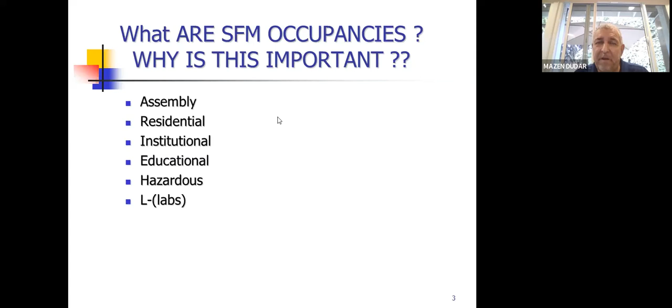Rated assemblies - what is actually an assembly to begin with? The way I define an assembly is different than the code. The way I define it is a bunch of stuff and material put together and slapped around, so it gives you a 30-minute, 1 hour, 2 hour, 3 hour, or 4 hour rating. And what is a 1 hour, 2 hour, 3 hour rating, and why are they needed?

They are simply needed because the elderly will take time to get out of a building. Sometimes you can put somebody in a wheelchair and wheel him out quick. And maybe somebody who's 45 and in good health can run and does not need the 1 hour wall. A 1 hour wall is pretty much theoretical, meaning it takes the fire a full hour before it crosses that wall, or 2 hours sometimes, technically based on test data and UL and ASTM fire tests.

Yet, do we need all of this? Highly likely, no. But what is the life safety percentage that we have in this country as far as fatalities from fire?

It's very low, and the reason for that is because we have great protection systems in place. So when a lot of people say, I don't need a 2 hour wall here, everybody can get out in 3 minutes, that's all true, but not everybody can. That's why we have areas of evacuation, sometimes inside the building, sometimes outside. We have rated assemblies, we're going to get into all of that, but again, rated assemblies are extremely important.

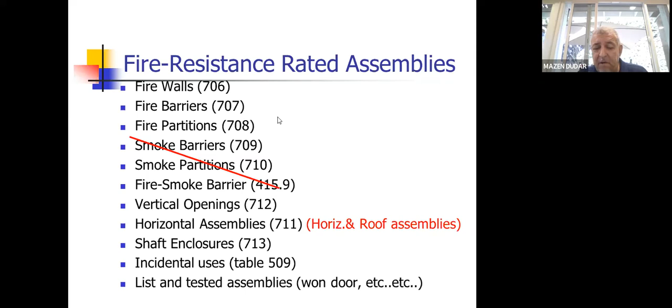Firewalls, fire barriers, fire partitions, vertical openings, we're going to cover all of that. Shaft enclosures, there's a lot that we're going to cover, and we're going to go through it one step at a time.

Okay, a lot of people attending this class may not even know about the UBC. Maybe people like Richard Lucas was here, maybe would know what the UBC is, and he may have heard of those terminologies before. But since the UBC has kind of parted from us since 2006, I would say it's been about 17 years. A lot of people have retired, and a lot of people don't even know what the UBC is or was. Yet a lot of us are seasoned veterans that still know what the UBC is.

So when a building inspector walks into your office, and by the way, if the pace is a little bit fast, my apology, it is a lot of material we have to cover, but a lot of it is actually just narrative. So bear with me, and we'll get through this.

A building inspector walks through the office and looks at the plan checker, and he actually shakes his head, and it happened to a lot of plan check engineers. And he goes, they're butchering that firewall. Okay, when you come in now and you say they're butchering that firewall, what exactly do you mean? The firewall, the fire barrier, the fire partition? What exactly are you talking about? Before, we didn't used to ask these questions.

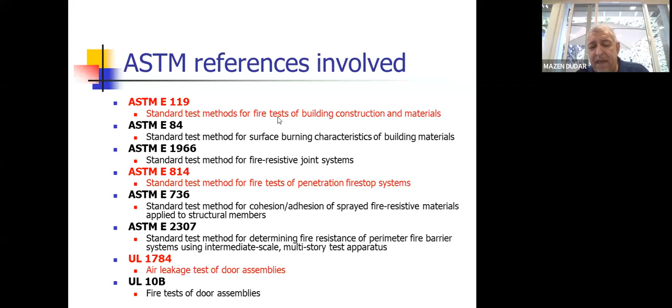Okay, here are all the ASTM standards that we use in tests. The most important one is the one on top, ASTM 119. That's the test for building construction and material. That's the one they run for a 1 hour test, 2 hour test, etc. NFPA has another number equivalent to that, and UL has another number equivalent to that. But ASTM 119 is the one that is most known.

And these are same tests, but different standards: ASTM E119, NFPA 251, UL 263. Any one of those three are equivalent to each other, pretty much. If not 100%, they're 99%. And if you meet one, you normally meet the other. So these are the three tests that you always want to keep in mind, and the most referenced tests.

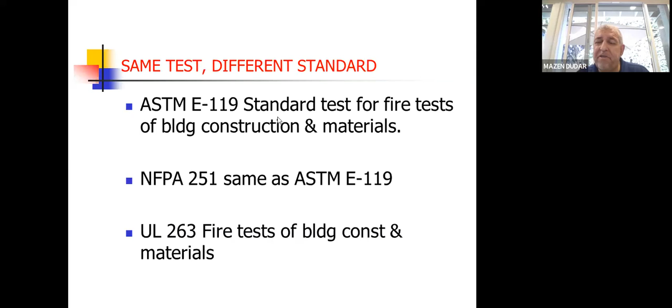What exactly are the tests, and how do they go through it, is really beyond the scope of this seminar. Okay, establishing fire resistance rating.

We talked about ASTM 119. We talked about UL 263. When we normally have these kind of tests...

You're not allowed to have a cooling effect or fire suppression system. So if you're testing a wall for 1 hour or 2 hours, you cannot be hosing it down or have sprinklers on it during the test. It's tested without it, unless that specific test requires the cooling effect. But normally speaking, you do not do that.

The building official can always accept, under alternate methods and modifications, anything other than a 1 hour, 2 hour, or 3 hour recognized assembly, through methods of testing or through methods of calculation, which I cannot go over again due to time constraints. But there's a way to calculate what every assembly is good for, half an hour, 1 hour. You can actually calculate that.

Okay, let's get into the nitty-gritty stuff now. Important definitions. What are the things considered important and relevant to definitions in this chapter?

First thing you're dealing with is fire partition. So it's a vertical assembly. It's a wall. It's a 1 hour wall. It's as simple as that.

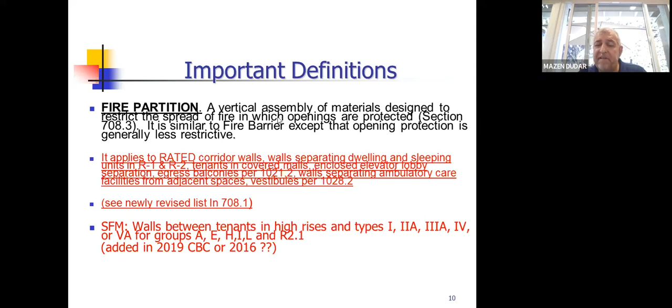Okay, here's a summary. I urge you, when you're dealing with anything in chapter 7, you can go to the code anytime, and this is really the reference. But feel free, and it's always good to come in and take a look at all the summaries I have for you. If you're dealing with a fire partition and you want the summary and don't want to miss anything, here are your summaries relevant to that.

I have an arrow next to the openings, and it shows you that if you have doors in a rated corridor, then you need a 20-minute self-closing door, rated 20-minute and self-closing. The transom and side lights, meaning the windows next to the door - to the left, to the right, or above it - are called transoms or side lights. These need to be 45-minute rated.

And any other window within that corridor - let's say there's a ballroom or an assembly conference room somewhere with windows - if this happens to be a rated corridor, you are going to need a 45-minute window assembly rating.

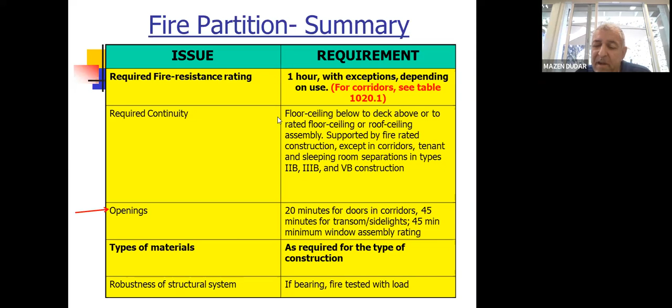Okay, let's talk about fire separation distance, which is also called the setback. The setback is the distance measured between the face of the wall and the property line. In this example, you can see 30 feet on top, 75 feet on the right-hand side, 15 feet at the bottom, etc. And these are all setbacks. They've changed the word - there's no word setback anymore in the code.

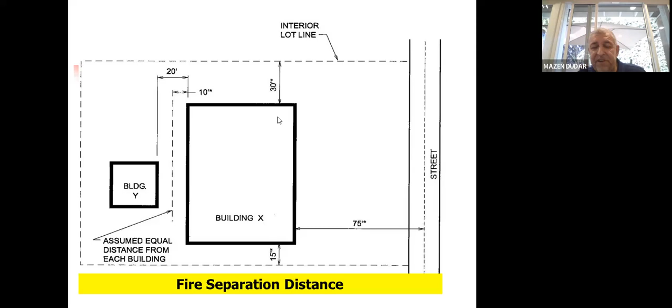It's called fire separation distance. I don't like that, I like to call it setback, but because we're dealing with chapter 7 and it's a fire chapter, the name is fire separation distance.

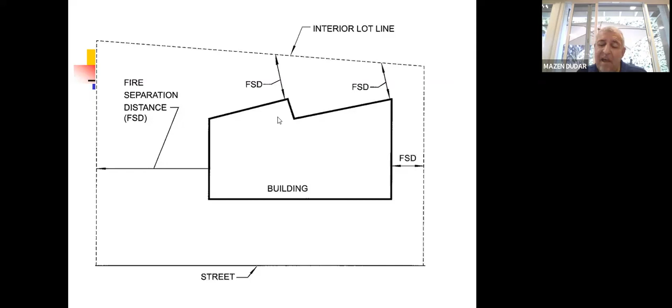What happens when you have buildings that look like that? Take a look at the top, the right-hand side, the left-hand side - you will see the FSD. Left and right are easy. The top ones, this is how you would measure it: you would measure it perpendicular to the building. You do not measure it perpendicular to the property line. The FSD line is actually perpendicular to the building, and that would be the distance that you measure for your setback / fire separation distance.

Now, when we're dealing with a 1 hour or a 2 hour wall, and you look at certain tables in the code and tell an architect or anybody else you need a 1 hour wall or a 2 hour wall, etc., the one thing I want you to know is that it's different when it comes to non-SFM occupancies versus SFM occupancies. Here's the difference.

Non-SFM occupancies: if your separation distance is under or equal to 10 feet, and that wall needs to be rated for 2 hours, then you need to have the 2 hours rated on both sides of the wall. The whole assembly needs to be there. So you will go to a 2 hour assembly and choose it, and that would be it.

If you're more than 10 feet, your rating is only required on the inside. If they decide to put siding on the outside, technically they can, but I would say no more than 0.5% of the people out there know that you can do this, rather than putting a full assembly. And they want - then everybody usually says 2 hours, I'll give you the 2 hours, and case is closed. So I don't go out there advertising all of this because I'm an advocate for safety. But can you only do it on the inside? Yes, you can. Yet nonetheless, nobody does that.

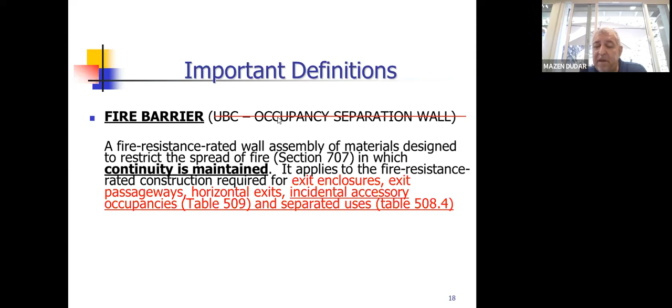However, anytime you're dealing with those, you are going to have a fire barrier to some degree, either 1 hour or 2 hours. Okay, we're going to continue with fire barriers.

Again, here are all the areas that would require a fire barrier. This is a little bit of write-up on the red. This is a complete list and where they are located. So anytime you want to know if you need a 1 hour based on what you have, I gave you the section, I gave you what is going to be required, 1 or 2 hours.

On the atriums, I just put in 2023 code changes for anybody who likes to read about atriums. I want you to know there's been a lot of changes, or some changes, in the 2023 code. It's not a part of the presentation, but I just wanted to let you know.

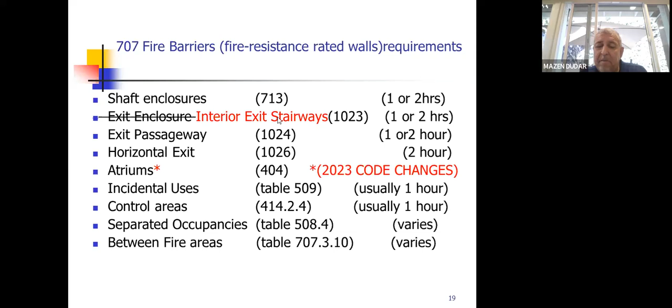All of these actually would require a 1 hour or 2 hours, or it may vary, like the bottom 2 cases. All of these are examples of fire barriers. It's a very good guide, this table, for where to go and what the actual rating is going to be required. The section is going to tell you exactly what rating is required, depending on the situation that you have.

Okay, we are still discussing fire barriers, but there's this table here, 707.3.10, which deals with fire areas. Now, what is a fire area? In a nutshell, if you are running out of allowable area in a building because of what's allowable to build, you can put in a fire area, follow certain provisions, and make 2 separate buildings.

When you put in the firewall, you create 2 separate fire areas. And when you create separate fire areas, that wall is actually going to be rated. And the rating of that is going to be as a fire barrier.

Let's go over that again. It's a little confusing, so I'm going to start from the beginning. If you actually have an allowable area problem, you can introduce a firewall. Okay, so I'm going to take back what I said - a firewall has nothing to do with this particular section.

However, you can introduce a fire barrier between 2 fire areas that you create, and depending on the occupancy, you would have to rate the fire barriers based on this table. So if I have a building and I decided to create 2 separate fire areas for whatever reason, and I end up putting a fire barrier in between the 2 fire areas, and one of the areas was an F1, the other one was a B, looking at that table, you're going to have to go with the 3 hours.

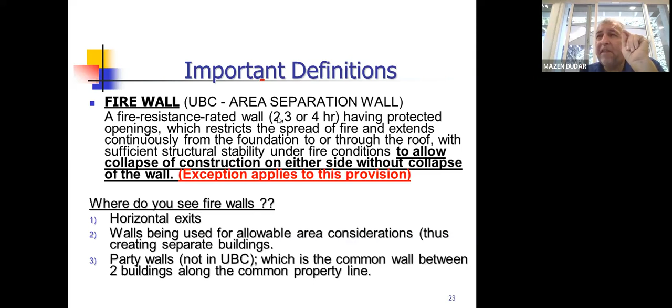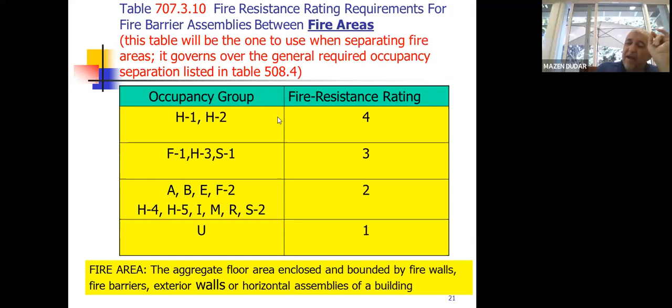But there are times where you would create separate fire areas of different occupancies. If you create fire areas of different occupancies normally within the same building, that's when you're actually putting in 707.3.10 — these are fire barriers. So you could have firewalls to create separate areas for allowable area, and within each fire area, you could have fire barriers separating occupancies. That is correct.

It's really confusing, and it's not that easy. Even I have to read it 50 times every time. Okay, thanks so much. You're welcome.

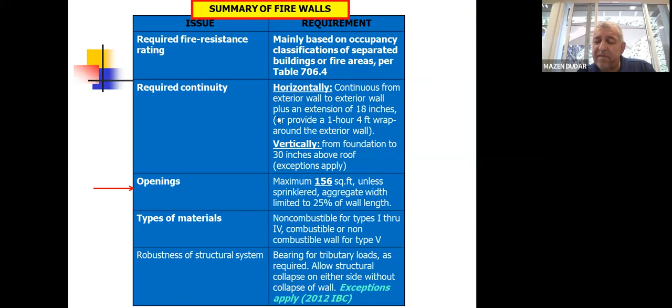Summary of firewalls: if you read this, it'll tell you the summary of any firewall you're dealing with. I don't want to tell you not to go to the code, but whatever the code tells you, it's right in front of you in that table. The most important one is the openings — how much openings can you have in a firewall? 156 square feet, no more than 25% of the wall length, similar to the fire barrier.

You have to go and put in fire barrier, protect all openings, and it'll tell you the number of how high the writing should be, where the sign should be. It should start no more than 30 feet apart and within 15 feet of the end of the wall.

We're not talking about a 10-foot fire barrier here or a firewall. We're talking about a 200-300 foot one, where you actually have to do that so a contractor or somebody can see this and realize we cannot cut that. Let's go back to the design architect and to the building department. This is the narrative, something that they can put in there.

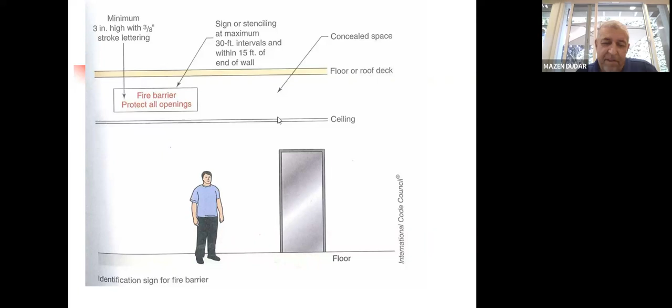Okay, now let's talk about exterior walls and the allowable area of openings. The code has changed a lot in the past 10 years. The code now allows you to actually have unprotected and protected openings within the same wall, rated for 1 hour and 2 hours. To me, I don't like that, because the fire doesn't know where it's going to go. The fire is not going to know which area is protected and which opening is not protected.

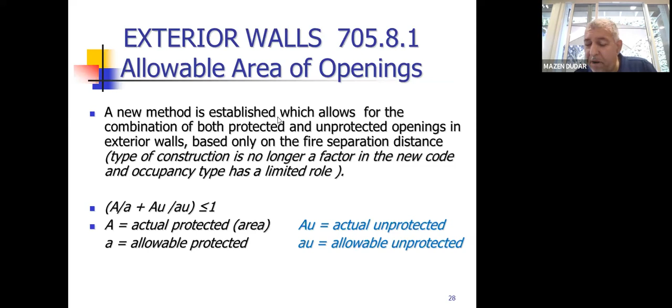The way it goes is always less than 100%. So your actual protected over allowable, plus the actual unprotected over the allowable unprotected, must be less than or equal to 1. Here is the table, which is not going to mean anything to you right now till we get into an example. So I'm going to get directly into an example and show you how that works.

I want to solve for the protected openings, and you can pick and choose where you want to place them. It's up to you. Again, it's not my favorite thing in the code, but it's in the code, and that table is extremely important.

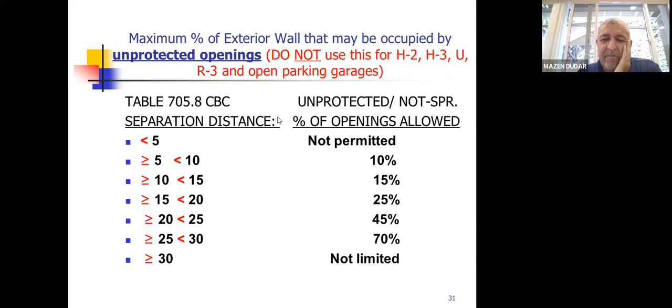This is the same thing as the table itself, but use it only if you're dealing with unprotected percent of openings allowed. This is the same thing as the table, but I trimmed it a little bit and did not put in the sprinklering. But this is the actual table. This is the one you should always go to. Do not worry about Mazen's creation, stick with this.

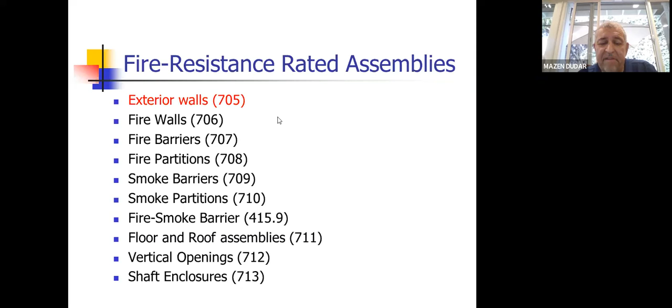Okay, let's go back and talk about rated assemblies. These are all the rated assemblies in the code, and this is their respective sections. We talked about some of them, and we're going to talk about a little bit more. I put all the sections in front of you, and like I said, smoke barrier, smoke partition, smoke fire barrier, we're not going to talk about that today.

Okay, this one has a lot of mumbo jumbo. I'm going to save you that in section 705.8.6 and take you directly to a diagram and explain it to you. Here I am dealing, I've got two diagrams that are the same.

If I have two buildings on the same lot, the first thing for allowable area, I can consider both of them per Chapter 5 to be okay if the aggregate allowable area meets the allowable area for the most restrictive occupancy, including setbacks, fire separation distance, etc. If both of them are within that allowable, then I don't need to worry about it at all.

But if I have a lot and I decide to put a building on the left, and the one on the right is existing, unless I'm doing the allowable area as one building, I have to put in an imaginary property line in the middle, and I need 15 feet minimum. If I do not have the 15 feet, and if I also do not have the openings on the building on the left at least 15 feet higher than the roof of the building on the right, there's going to be a requirement to protect the windows in the building on the left.

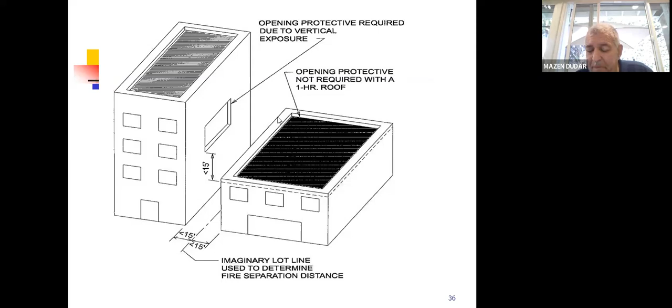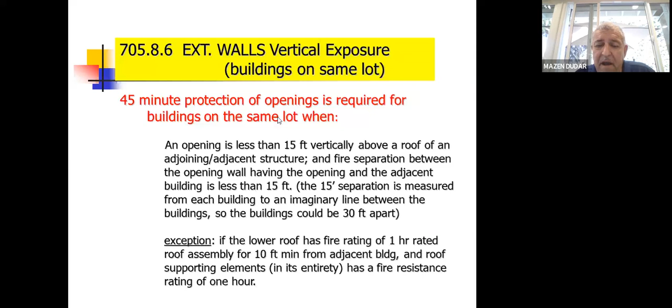Okay, now required opening protection for exterior walls. When you need to rate fire doors, we're going to go later to a specific table. We're going to also go to a specific table in section 716.1 for fire windows. And remember, we just talked about rating all that stuff here, all those openings on the left-hand side, unprotected openings or protected openings, per this section.

If you have a sprinklered building, the exterior openings may be protected by an approved water curtain. I don't like it personally, but again, it's not about me, because if it's a sprinklered building, well, you're just giving me more water on the opening. I don't like that. I already have water, and my water supply could be messed up very quickly in an earthquake, who knows.

I would rather have the rated openings and the rated shutters and all that. But again, you cannot deny an applicant the exception if they want to approach you and put in a water curtain, which is sprinklers probably on the outside, maybe also on the inside if you require it as a building official. The City of LA, I think, has a detail relevant to how that's done or how that's approved. I did not see it much in LA County.

A lot of the designers and architects simply do not know about that. Is it really your job to advertise it? You can if you want to. It's in the code, you're not really hiding anything. It's not my favorite thing, but the code does allow you to put that instead of rating the exterior openings, which are very expensive. Putting a water curtain is a whole lot cheaper than rated openings, etc.

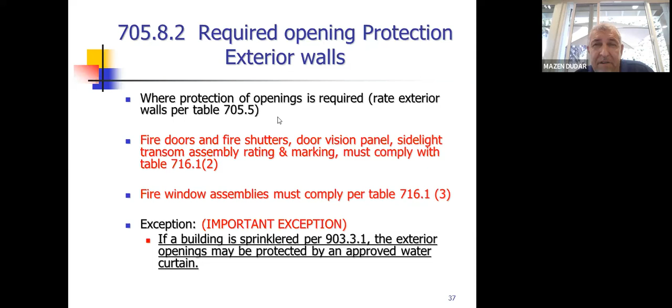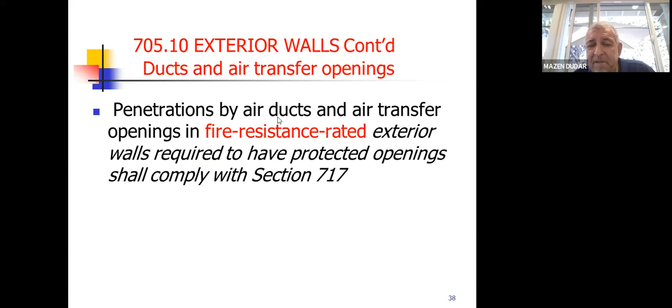Okay, we're also going to talk about ducts that are penetrating rated assemblies in section 717 and how to deal with that.

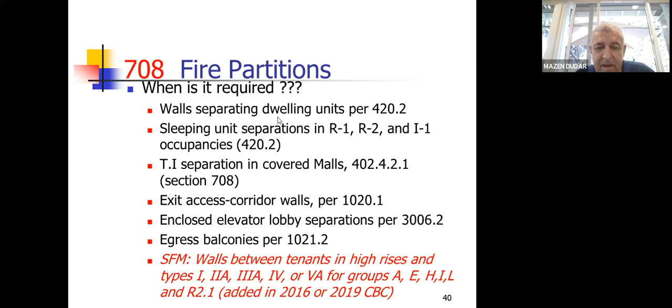Anytime you penetrate a rated fire partition, you need a fire damper. But there's an exception in the code: if you have a sprinklered building other than Group H, you can omit that fire damper in a fire partition, provided you're dealing with a 26 gauge HVAC duct. Omitting fire dampers is really a huge money saver.

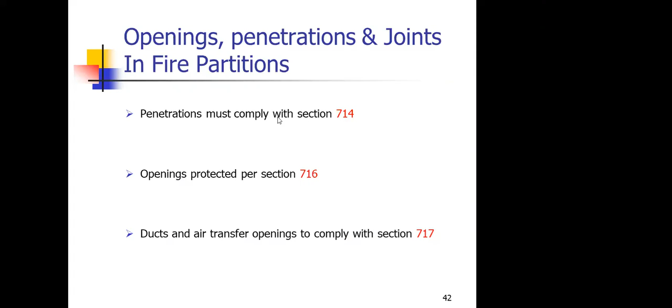Anybody have any questions before I continue, or shall I keep going? Hello? Anyone? Cynthia, Mazen, I don't see any questions in the chat. Okay, great, I'll continue. Let's see how we're doing on time. We're doing fantastic on time.

This now gets a little bit hairy as we get into the subject matter. We're going to dig a little deeper now and talk about penetrations, protection of openings, and how to deal with duct and air transfer openings when they're actually penetrating a rated assembly, which is section 717.

Now we're going to deal with opening protectives. When I have a firewall, it can have no more than 156 square feet of openings, and it also needs to meet the criteria of 25% of the length of the wall. So if I have a 1,000 square foot firewall, I cannot have more than 156 square feet in area as far as the opening goes, total openings. As far as the length of the openings, I'm restricted to 25% of the length, so 250 feet. That's basically what's required.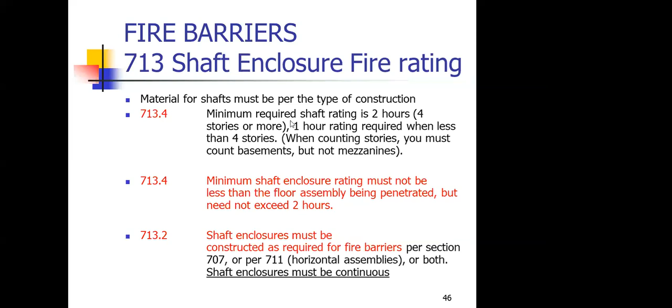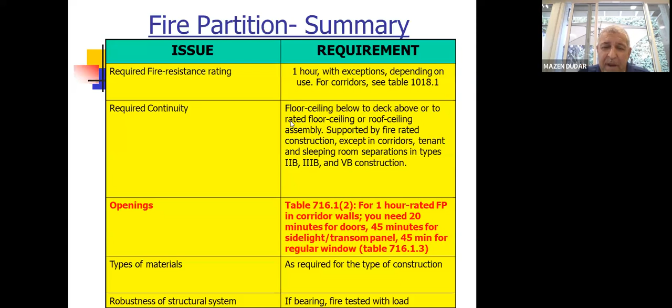Mazen: I'm a little confused about the rating of the corridor also. You're confused about what? The smoke dampers of the corridors, rated corridor also. I think we need smoke damper for corridors, if it's rated. Yes, I didn't say you don't need them, all I'm saying is you would need... Oh, you're saying we need a smoke damper, not just a fire damper, correct? Yes, sir. We're gonna get to that. I gave an example relevant to the fire damper, with the exception of the fire damper. I did not say you do not need a smoke damper. There is a table that will show all of that, and I will get to it at the very last slide. If it's required, it will be shown in my slide. Or just the fire damper can be exempt under certain specific rules. We never said you do not need a fire damper, we just exempted a specific application, that's it. So hang on, I will get to that in detail again.

Okay, thank you. So where are we? I forgot. Okay, now I'm on slide 46. We're going to talk about shaft enclosures now.

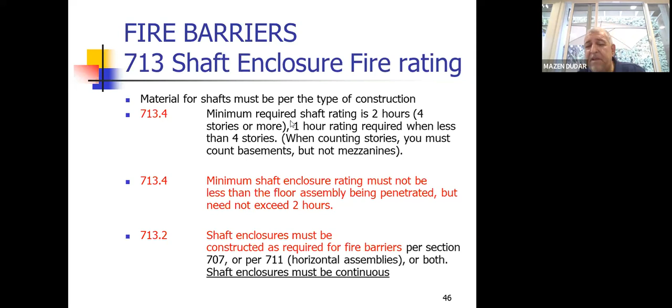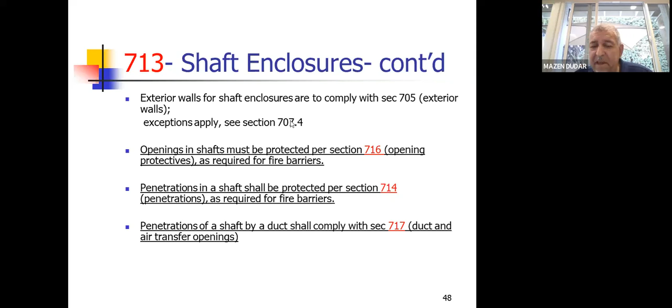As we deal with shaft enclosures, we're going to get into the openings - that's the section for penetrations in 714, and the shaft penetration by a duct in 717. This is just preparing you for the sections coming forward.

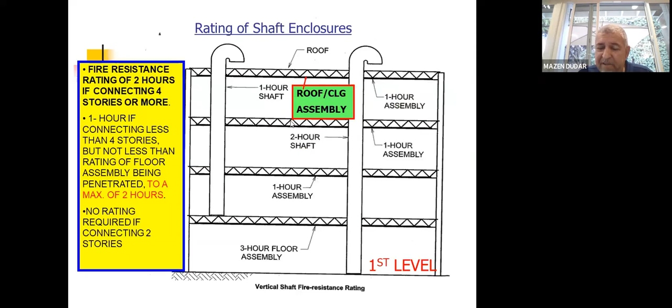When dealing with termination rooms like chutes - for example, in a 4-story condo complex, people go in there and throw their garbage and refuse down a chute, and it comes to the termination room at the bottom - that could span 4 or 5 stories, and these would be fire barriers based on what I just showed you in the diagram, either 1 or 2 hours depending on the side.

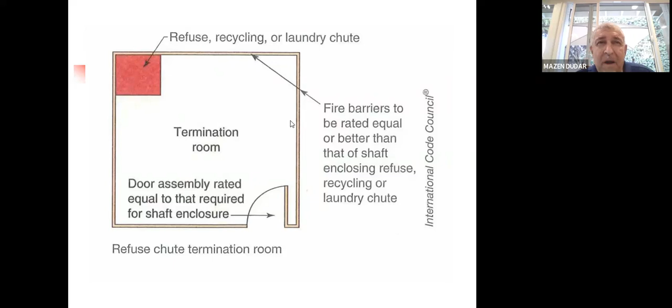And the door actually has to now be rated as well as that required for a shaft enclosure. So the fire barriers may be the whole room, plus you need to also rate the door, and the door needs to be self-closing. We don't see that too often, but remember, your fire barriers and the termination room at the bottom need to also follow the same sequence along with the door. The door at one point didn't used to be required, and I know they added it - I just don't remember how long ago, maybe in the 2013 cycle.

Look at number 1: there is no limit on the size of openings of adjoining fire areas that are sprinklered. So if I have 2 fire areas, one to the left, one to the right, with a common fire barrier in between, and both are sprinklered, the 156 square foot rule is out. The openings must still be protected, and the 25% rule of wall length - the maximum opening allowed - is still applicable. It could be a lot to deal with because it's a lot of criteria, but go to that page and read the exceptions, and you will find it.

Fire door serving enclosures leading to interior exit stairways: so when you're in a 10-story building, you open the door to go into the stair enclosure. Even though that's a stair enclosure, meaning a rated shaft, and the door is opening into the shaft, the provision of 25% of the wall length and the 156 feet do not apply when you're opening a door to get into the exit enclosure. You cannot tell somebody you're exceeding this or that - it does not apply. Also, look at number 4, it does not apply when you finish the stair enclosure and end up at the bottom with an exit passageway that takes you to a lobby or directly to the outside. That rule does not apply either.

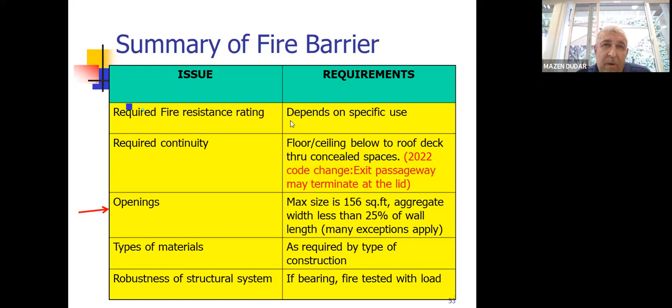And that makes sense. I'm already in a safe haven rated 1 hour or 2 hours. Why would I need the walls to go all the way? It made absolutely no sense the way it was in an exit passageway before. So that's just a little change in chapter 10 I wanted you to be aware of.

Okay, smoke barriers we're not covering. Summary of smoke barriers, we're not covering that either.

And as I actually said in my class before at the County of LA, when I called her, because it came with unlimited changes, when I called her one time to make the changes before my presentation 4 months ago, she reminded me that she actually has a mortgage now and she doesn't have the time for me. So that was the little joke there, and that will continue.

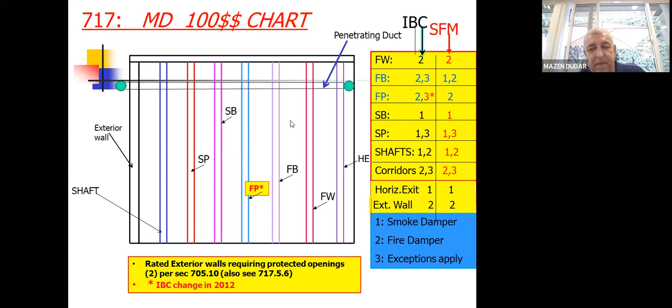Okay, floor and roof assemblies - these are the horizontal assemblies. We're dealing with table 601 and 705.5. The two things I needed to keep in mind: requires separation of occupancies, horizontal or vertical. Go to table 508.4, it's a different subject matter. And also 707.3.10, which is this one that we've talked about too earlier.

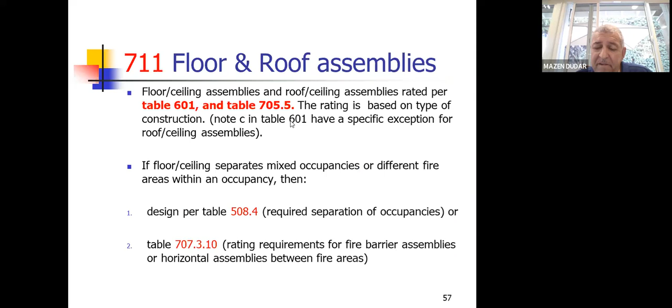If you are using this requirement for fire barrier assemblies or horizontal assemblies between two fire areas, then you would actually need to go to that table.

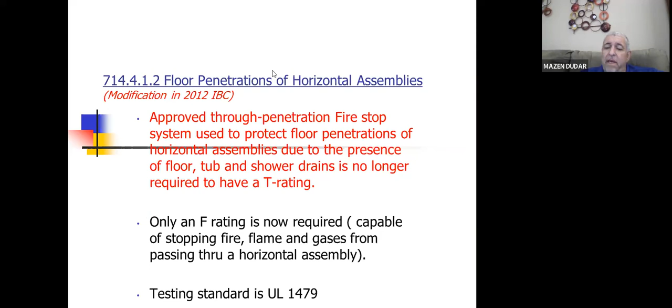So we are going to deal a little bit with floor penetrations of horizontal assemblies right now. I'm not going to spend too much time on this, but I do want to let you know what an F rating is and what a T rating is. An F rating is now required to stop fire, flame, and gases from passing through a horizontal assembly. The test standard is UL 1479. When you have a rated floor assembly and you have something like a drain there, you have to have protection. There is something called a T rating and an F rating. The T rating is no longer required. Only the F rating is now required when you have that situation in a rated horizontal assembly.

What is the F rating and what is the T rating? There are two measures of fire stop systems that indicate how long they can resist fire and heat. The F rating is the time required that a barrier can prevent the passage of flame through an opening. The T rating is the time the temperature on the non-fire side of the barrier does not exceed a certain temperature. So when you have an exit enclosure in a 10-story building, a lot of you may know that it's a 2-hour rated shaft enclosure or exit enclosure - they call it now interior exit stairway, by the way. The doors are an hour and a half rated, and on the other side, the non-fire side, it needs to be able to handle 450 degrees. That's what they call a T rating. The F rating is what is going to be used now on that drain.

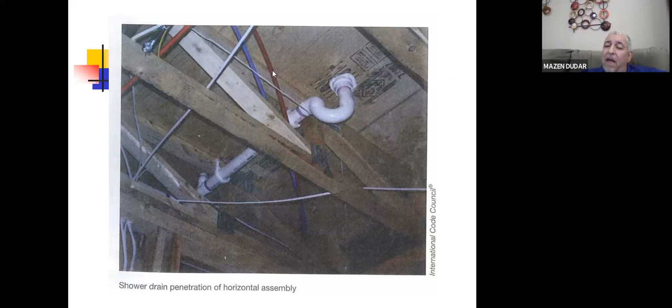You do not need the fitting to be T rated. These are things that a building inspector needs to ask for when you see a horizontal rated assembly with something like that - show me the F rating for the assembly that you are putting, relevant to the connection. Okay. It talks about which is easier to achieve here.

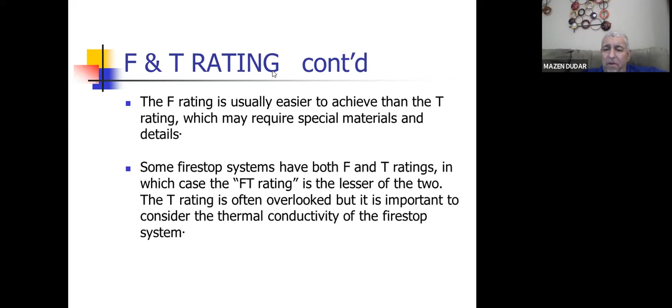Here are also other exceptions when you do not have to have a rated shaft. These are the two most important ones I want you to remember: you don't need a rated shaft between a mezzanine and the floor below, and for exit access stairs and ramps per section 1019, meaning it is not an interior exit stairway. An interior exit stairway basically used to be called exit enclosure. So if I have a 2-story building, the stairs could be open - they do not need to be in a shaft or within walls and rated enclosures. Once I get into a 3-story building, then I actually have an interior exit stairway, previously known as exit enclosure. I do not like the word interior exit stairway - I like the word exit enclosure, because I already know I am in a rated system. Now every time I hear interior exit stairway, I have to translate that into rated, since I'm used to the word exit enclosure from years of use.

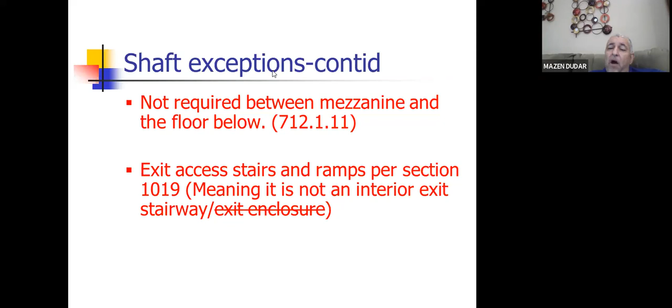We're going to talk a little bit about wall penetrations. Anytime you penetrate a rated wall, whether it's the garage to the house or many other applications, you have to use sealants that are equivalent to the wall rating. 3M makes a lot of rated good sealants, 1 hour, 2 hours.

Mazen, I have a question. Go ahead, Richard. On a two-story building, if I have an elevator, does the elevator shaft need to be rated? No, never. Elevator room, equipment room, you don't need to. But if it goes to a 3-story building and it needs to be rated, now you have to create a lobby, which can even be exempt if the building is sprinklered. But on a 2-story building, that's totally optional.

The inspector's job is extremely important when it comes to looking at sealants being used out in the field. I would definitely ask to see the sealants being used, to confirm they did not just pick up a regular caulking, but an actual tested, rated 1 hour or 2 hour sealant when I have a conduit penetrating a fire barrier, etc. I would actually go the distance and ask for that. I need to see what they're using.

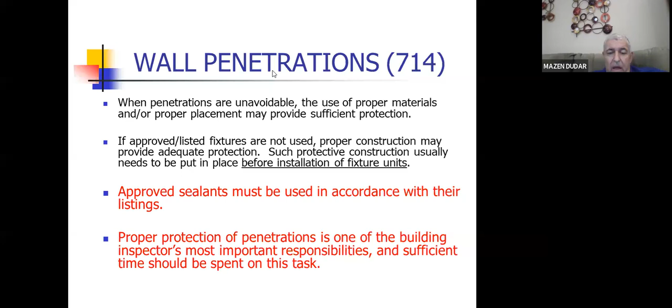Okay, same thing for penetrations. If you want to know what sections to go to for horizontal penetrations of rated horizontal floors, or fire barriers, firewalls, etc., I just gave you the sections to read. And from now on, there are a few things that I need to show you that are helpful.

So they do sell them. They don't really sell a whole lot that are not rated out there, because they normally use them in high rises and buildings 3 stories and higher.

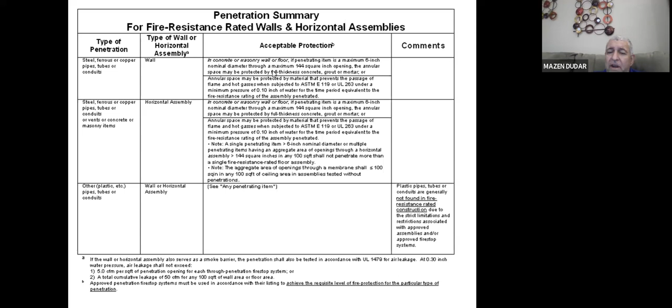I'm going to give you a penetration summary depending on the type of walls. These were not created by me - they came to me one time from Stuart Tom, maybe over 10 years ago. A couple of sections may have changed, but they are still very helpful. You enter this based on the type of wall, type of penetration, and you see what kind of protection you need. It's a very good summary from the code that he put together.

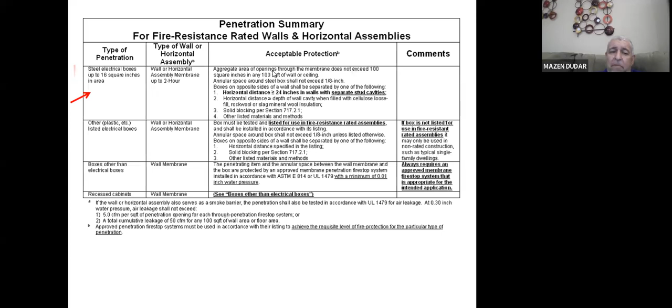I am going to go over one example relevant to this, when I have steel electrical boxes in a rated assembly, and I'm going to take you directly to that example - automatic sprinklers, recessed lights, penetrating assemblies. It'll tell you on top you need what they call an escutcheon plate.

And when you have recessed lights in a rated ceiling, even the recessed lights need to be rated, or the building official needs to approve the sealant used around them for that annular space when they penetrate that 1 hour ceiling, which a lot of building officials say no to - go by the rated recessed light assembly instead.

Okay, so this section here came from this. The one you see on top is actually this, and I'm going to take this one and give you a quick example. We're going to move forward.

Here's another one for all the listed electrical boxes of any material, penetrations. Here is one that is strictly for steel electrical boxes. When I have steel electrical boxes penetrating rated wall assemblies, and I have recessed fixtures like electrical boxes, how do I deal with that? What do I do? Here's a diagram, and yes, my daughter helped me with that one.

So in a 10 by 10 rated wall assembly, let's say of 2 hours, the sprinkler actually gets a little plate called an escutcheon plate.

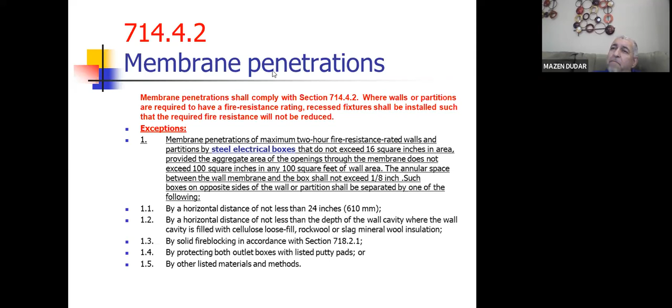However, we both know in rated assemblies we see them back to back every day, all day. You can do that. But you see that 1/8 inch max there that you've created as far as the annular space? Go back to the exception here and read 1.4 at the bottom, and you can use rated, specially listed putty pads that you'd apply in addition to blocking, probably right behind it in that area within the wall, and you can have them back to back. But if you don't do that, you need to keep them 24 inches apart when they're on different sides of the wall.

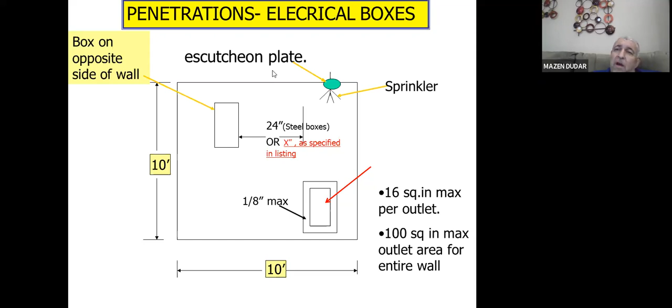I'm not an expert on this, to be honest with you, but this is as much as I know. I ask inspectors to get familiar with that section because they'll see that a lot, especially in Los Angeles, where they're always developing a new 10-unit apartment complex, etc.

Okay, this is slide 78, opening protectives.

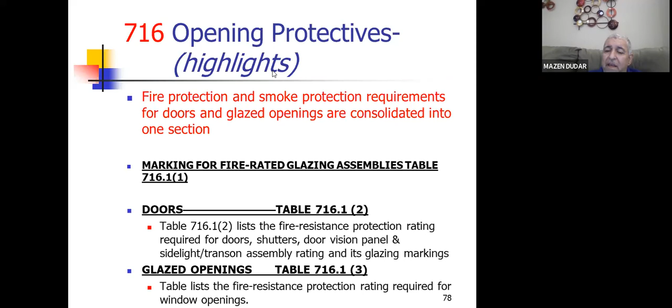And this is the marking. So when you see a window and it has etching on it with all kinds of mumbo-jumbo stuff, you have no idea what that is, I'm going to tell you what that would be. The table says fire-rated glazing assemblies, but the table also has things that are actually for doors. Take a look at this.

This is table 716.1. If your marking on a window is W, it means it meets the wall assembly criteria. If it's OH, it meets the fire window assembly criteria, including the hose stream test. These are the things you'll actually see on a window. If you see D on a door, it means the door has met the fire door assembly criteria testing of NFPA 252 and UL 10B. If you see T, it tells you that it meets the 450 temperature rise for 30 minutes.

And where do you normally see that? That would normally be on a glass window that is within an exit enclosure door. That's where that T would be, or it could be on the label for the door itself. That is the T rating, and usually that's required in an exit enclosure.

Now the ones in yellow, FC—what it says in yellow means it meets floor ceiling criteria. These are the changes that were made in the 2022 code; they actually added FC there, meaning it meets the floor ceiling criteria. They're talking about a wall assembly here, but they also want to make sure it's not just the wall assembly—it could be a wall assembly or a horizontal assembly. So they revised that table in the new code with the yellow markers I've shown on it.

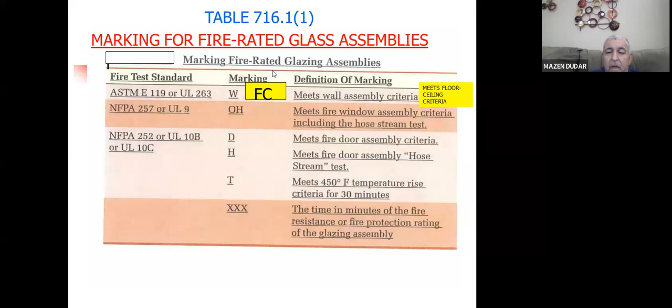And it talks also about fire protection and fire resistance glazing. We're going to define those later. And it talks about the windows.

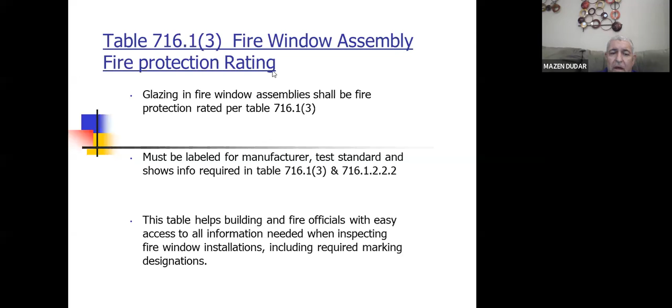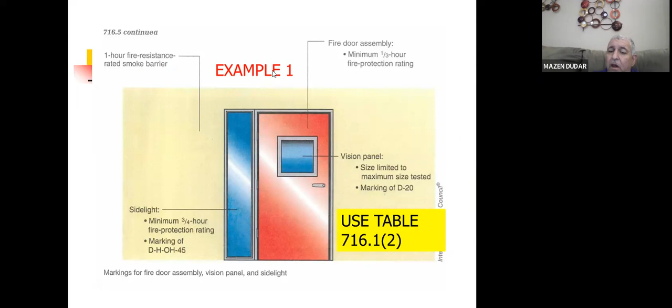As far as the side light, let's go back to the table and see what the requirement is. I'm talking about the window located to the left of the door. You'll see that needs to be, which is column 6, 3/4 hour. If you look at column 6 of this table, the heading says fire protection and fire resistance glazing. What is the difference between those? We'll get into that once we get into that perspective section. With that, this example is done. There's another example here you can do on your own using table 716.2. I'm going to go to an example, and this is the table to use for example 2.

I'm going to do example 3 here, which is a glazing protection example. I want to use table 716.1-3. I'm given a 1-hour incidental use fire barrier wall. I need to know the required protection for that fire window you see. I'll go to table 716.1.3. It will tell me, here's the arrow - if you follow it, it tells you that you need a minimum fire window assembly rating of 3/4, which is 45 minutes. So that's a 45-minute window, and the marking is OH45 or W60, meaning it can meet the hose stream test at 45 minutes, or it can meet the window requirement rated for whatever. Either one of them, that's the marking you're going to see on the window.

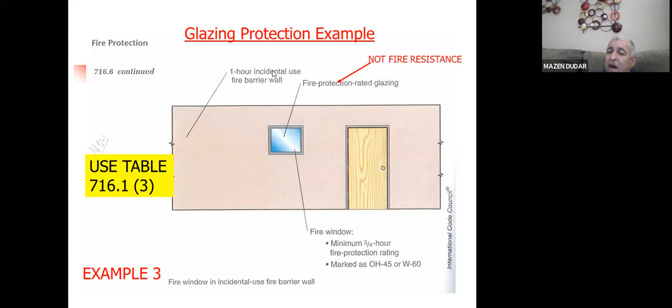Look at the term fire protection rated glazing - I wrote above it, not fire resistance. What is the difference between fire protection rating and fire resistance rating? A fire resistance rated window is much better than a fire protection rated glazing. Fire protection rated glazing only gives you up to 1 hour of protection. A fire resistance rated window can give you that and can also shield the heat from one side to the other.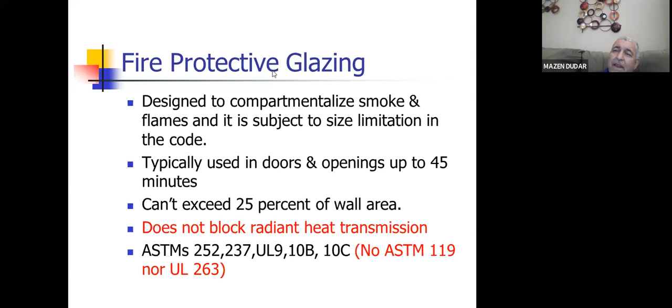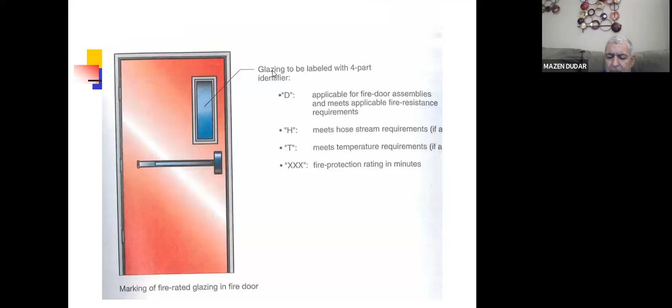The only time that I see a table, and I always think it's a flaw, but I've never applied for a code change with ICC—maybe I should talk to Paul Armstrong—is this table here. I'm going to take you back to that. Let me find it. Goodness.

I don't know how you can do that when fire protection is only limited to 45 minutes. Anytime you're dealing with 1 hour or more, you can't have a fire protection window. You must have a fire resistant window. So that 1.5 hours there, in my opinion, should state not permitted. I'm going to ask Paul to look into that. That's always been an error to me, but whether I am wrong or not, I will have to approach him. I just wanted to show you where there could be an error on a table.

But maybe for a retired guy, I'm not looking to make code changes. I just go with the flow. Okay.

Let's talk about fire resistive glass. It blocks radiant heat. It can be used on walls and doors, 60 minutes and above. Look at all the ASTM measurements and classifications you can have. These are the right ingredients: 119, 251, 263.

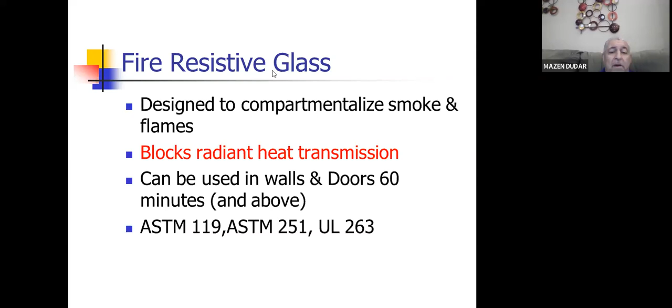If you remember at the beginning of the session, on like slide number 3 or 4, I put in a slide that says all those 3 are exactly the same. This is the one that plays a big role when it comes to this. Please excuse me one second.

There are size limitations for fire protection rated and fire resistance rated construction. The heading of that slide is wrong, my apology—it should be size limitation of fire protection rated and fire resistant rated construction glazing. Please adjust that in your presentation, or I will make sure I fix it before I give it to the basin chapter. If you want to know how much you can have relevant to fire resistance glazing and fire protection rated glazing, there are limits on how much you can have, and there are certain requirements.

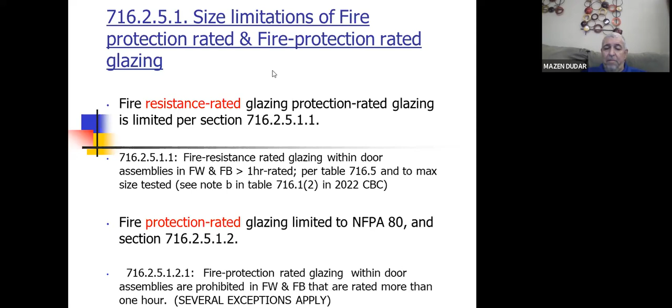For time constraint being 2 hours, I can't go much over that. There is a note in a specific table, and there are guidelines, and I've given you all the sections and everything you need about it in case you decide to dig in deep and read anything about that. Remember what I mentioned about these 3? These 3 are exactly the same tests.

Ducts and air transfer openings. This section is basically dealing with ducts that penetrate a rated assembly.

Each one of those criteria has a table you can look at. If a duct is penetrating a 2-hour fire resistant rated assembly, then I need a 1.5-hour damper rating, whether it's fire, smoke, or what have you. If you're penetrating more than a 3-hour fire rated assembly or equal, then I need a 3-hour minimum damper rating.

Openings in attics and draft stops. The one thing I want you to know about a draft stop is it's not a rated assembly. It's an assembly, but not a rated one. Look at the bottom in red - it can be rated if you decide to, yet it's not required to be.

When we have apartments or condos or units, we have a 1-hour wall in between, and that wall, as you know, continues all the way to the roof. Now, from what I recall, you do not need a full 1-hour rating all the way to the roof. What you need is only a draft stop in that attic, and the 1-hour wall can actually stop at the ceiling. The part that continues into the roof is the draft stop.

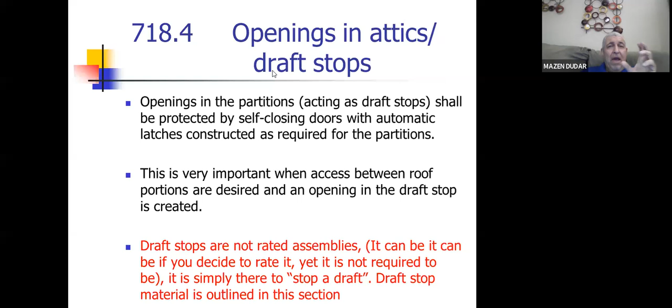If you do decide to put any opening in it, that wall can have openings, but they have to be self-closers inside that wall, which is the draft stop. Again, it is not a rated assembly. You can make it a rated assembly, but you don't have to.

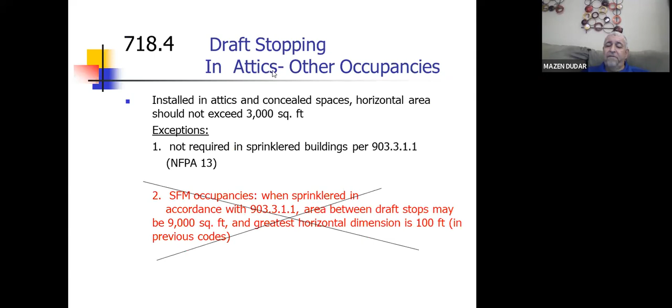There is a criteria in the code that has been eliminated. Usually in attics, every 3,000 square feet you need a draft stop. It even had the criteria of 9,000 square feet by the state fire marshal if sprinklered, every 100 feet, etc. They took that out of the code. It's no longer there. This is basically if you're dealing with any non-state fire marshal occupancy.

In case you are dealing with a non-state fire marshal occupancy, and you want to know what's required, you simply go to the table here, and it'll tell you the section and what's required.

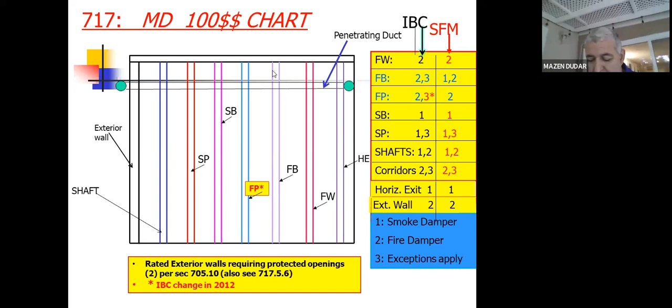With that, I've actually finished the presentation. The forthcoming 7 or 8 slides are in chapter 9, which is not part of this presentation, but I wanted to give you those to show you when sprinklers are required in a building based on chapter 9.

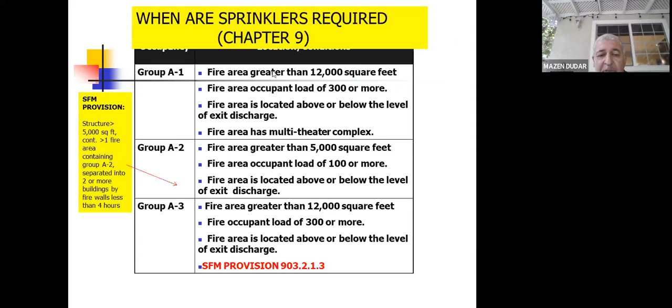And these are the ones - there's this, there's that, and all of these have been upgraded based on the new code.

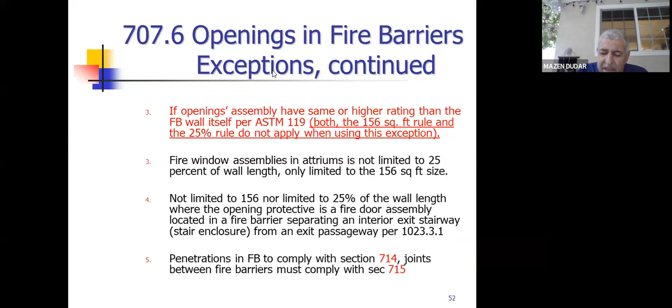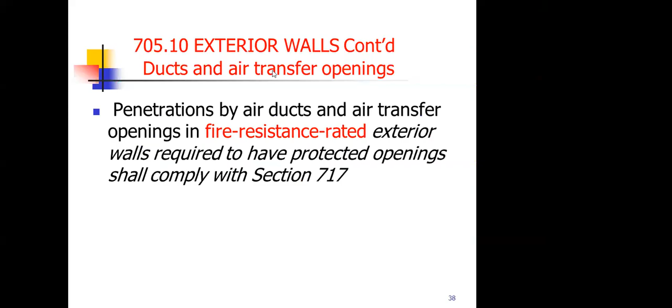Okay, can you read me that again? Is he asking from a table or that I put it? Yeah, from the table 705.8 for allowable area of openings. Okay, I'm looking at it now.

Go ahead. Under the footnotes for unprotected and sprinklered, when it refers to section 903.3.1.1, can that also be used for NFPA 13R? Okay, what footnote is he talking about? From what I know, this table can be used for anything relevant to exterior wall opening and deciding what percentage and the location, etc.

Well, when you're referring to unprotected, I believe I know what Reza is getting at. The footnote says 903.3.1.1, which is NFPA 13. So I think NFPA 13R will not work here because it clearly says NFPA 903.3.1.1 is NFPA 13. So Reza's question is, if I use that for residential NFPA 13R, will that work?

I can't answer it right away. So you're telling me to read the note for unprotected openings in buildings not equipped or equipped. Which one are you talking about? I'm reading the note. There's two notes at the bottom, right? The footnotes.

Are you there? Yes. And Reza's question is if it's okay to use NFPA 13R and use this line, but NFPA 13R is not covered by 903.3.1.1. So yeah, I would jump in and answer on your behalf, Mazen. So, yeah, the footnote clearly says that 903.3.1.1, which is not including NFPA 13R. That should be the answer.

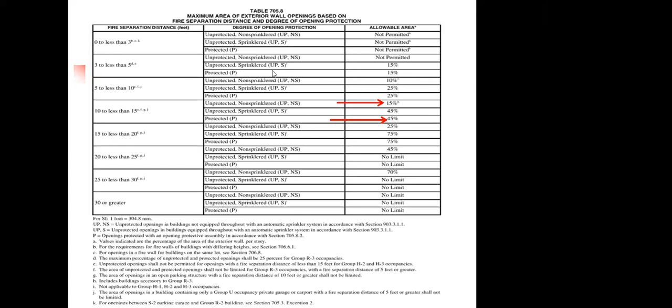Thanks again, everyone. Eugene, just for the record, really quick, what I will do is today is Wednesday.